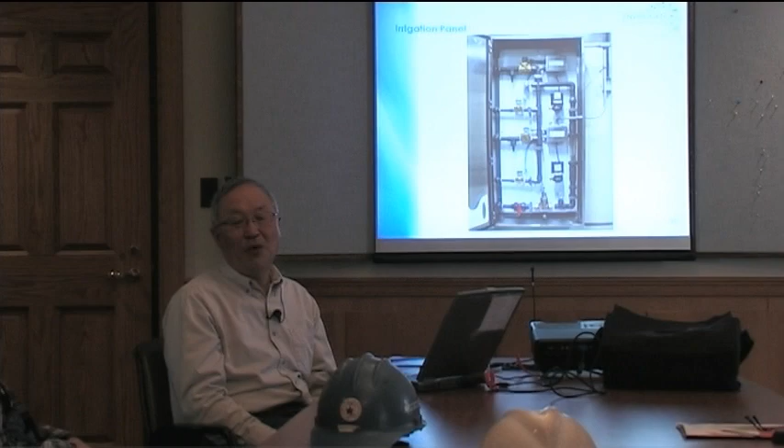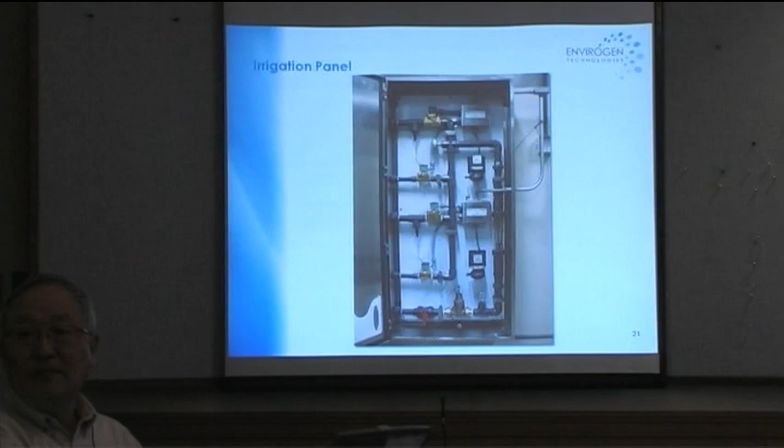We prefer to err on the higher end, so close to that is good. If it starts dropping lower, you want more water. But if it's much higher than that, you might be adding too much water. This is under steady state condition.

From the very beginning, you start neutral, like 7. If after two months, when the bug population is fully developed, you still get 6 or 7, that's too much. Then reduce the water usage step by step, and it will reach steady state quickly.

I think you guys already have a pretty good idea on system number 1, developed on the same design, similar concept, everything. On the other system, in previous O&M, it was 2 to 3, and the other one was 2 to 3 as well, that's why I was curious. It seemed 1 and 2 were okay, kind of low - you can go down to 1 to 2.

But ours is typically more like 4. Did you check it today? The biofilter - what was the pH today? It was higher than that. Is it usually 6? We'll go over that tomorrow.

We were also told with the last sample that we need too much water. If that's the case, you probably added a little too much in the high end. Adding too much water won't hurt the system, it'll only waste some water - you don't hurt the system. But if you have too little water, you will hurt it. If there's too little water, either the acidity goes too acidic or the media can go dry, and that's no good. If you add a little too much water to get the pH a bit higher, that's no problem - it doesn't hurt the system at all.

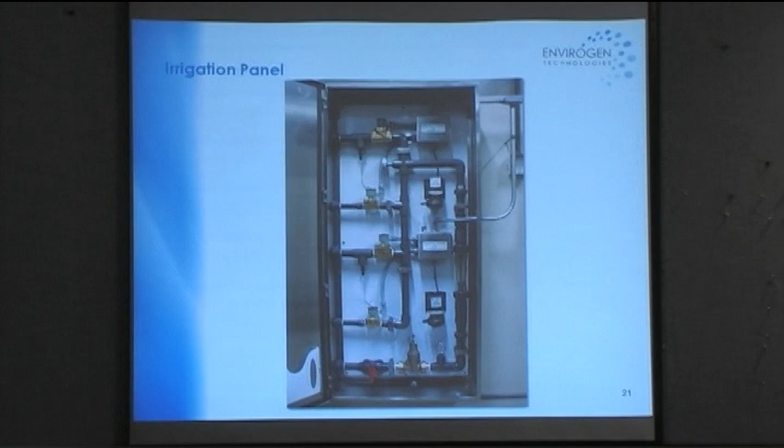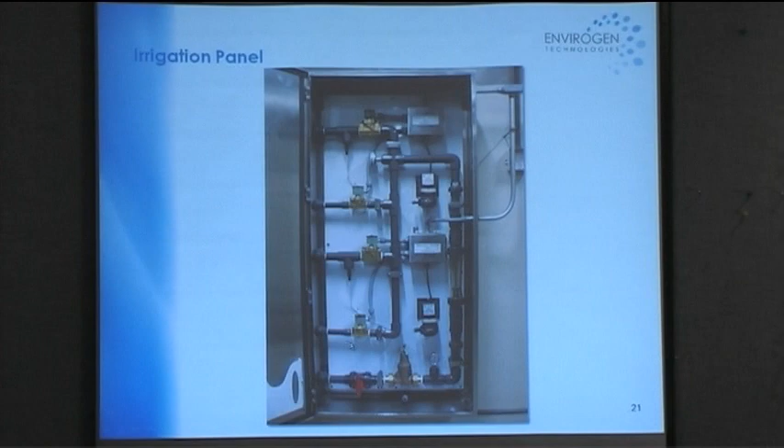Now we're at the irrigation panel. What you have is a big stainless steel box again. Inside, you have 4 solenoid valves - for each chamber, you have 2 solenoid valves, one for the lower irrigation and one for the upper irrigation. So with 2 chambers, you have 4 valves total.

Also you have two nutrient pumps in here, like the gentleman just asked - this is one pump, this is the other. Then your water comes in here, and we have a shut-off valve, then you go through a regulator to set the water pressure.

What we want to see is you set the water pressure. When the water is not flowing, you get about 60 pounds - anything between 60 and 70 pounds is fine, it can change a little bit. Right now the settings are good. When the water is flowing, the pressure will decrease a little bit.

What we read for the past 2 days is about 50 - that's fine, that's good. Here's the water flow meter. When the cycle is on, you can read the float from the top to get your GPM flow.

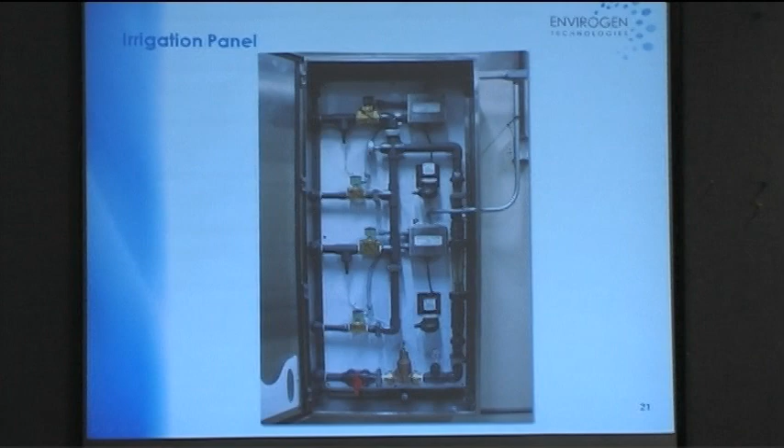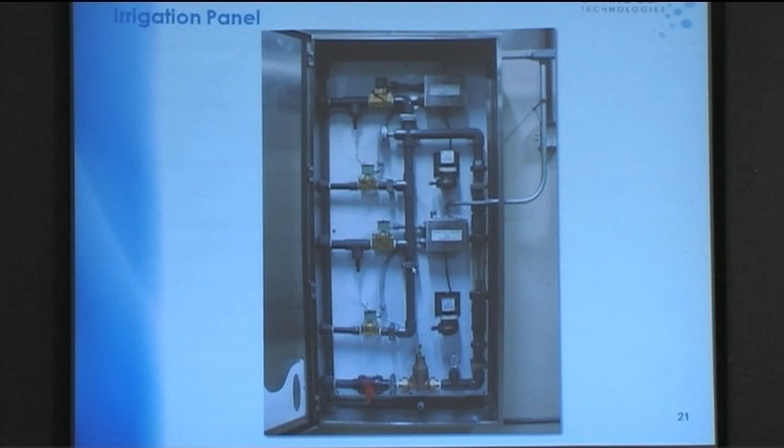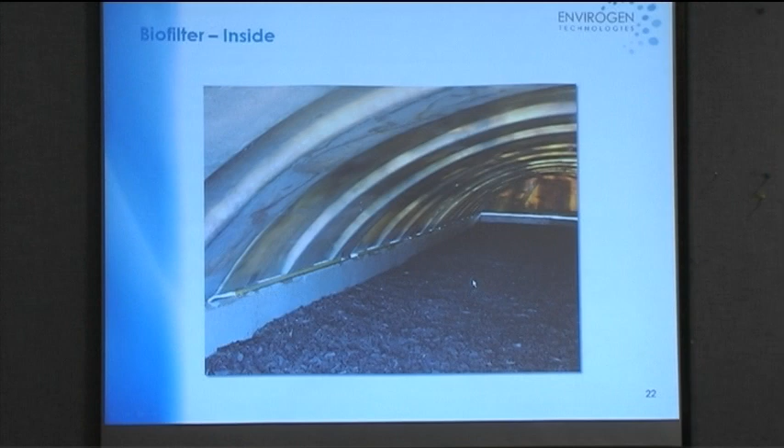Here's the view of the inside of the biofilter. You don't see the spray nozzle - this picture was taken before the upper irrigation nozzles were installed. You can see the media is packed up to this level - this is organic media.

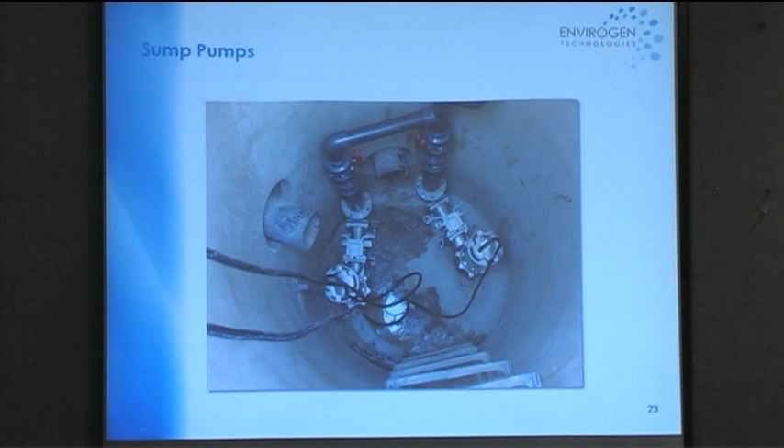This is your sump, the irrigation sump. And what you have is 2 recirculation pumps in here, and one is on duty, one is standby. And this, again, we supply the pump. We did not design the whole thing.

So I think the concept is you use this pump and pump the water through this, go here, go up to this humidification chamber. We have 4 nozzles on each chamber, so then spray water into there. Then the water come from that chamber, come back to this sump through this pipe. Looks like this is a 6-inch pipe. Let's get back to here.

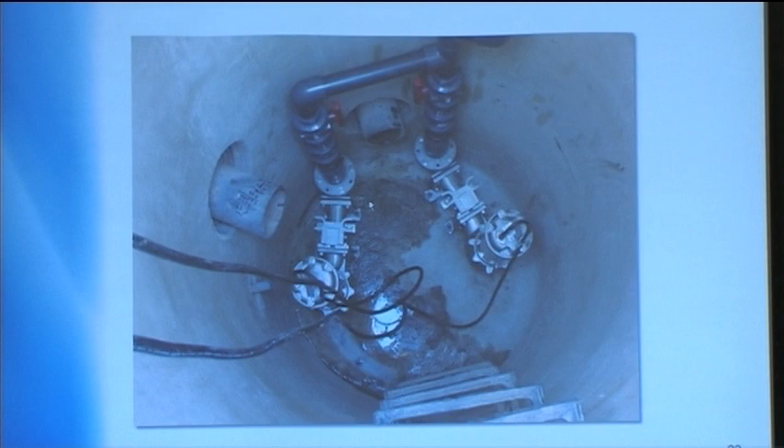And when the water goes up to a certain level, you have an overflow pipe in here. This overflow pipe will take the water from this chamber, from this sump to the waste drain sump to the other one. Okay, then periodically you need to add fresh water to this sump through this pipe. This is a pipe, show up in here.

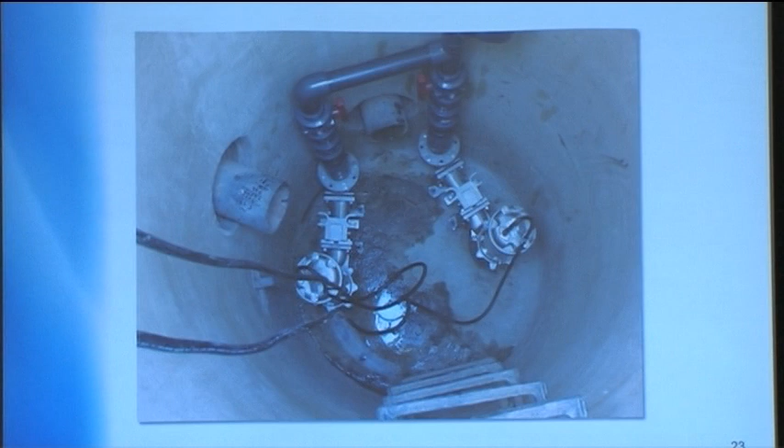So this is controlled by 2 level switches. I don't see the level switch in this picture. I don't know where, it's hanging in there somewhere. Yeah, it's on the top probably. Yeah, we don't see it in this picture. You have 2 level switches there.

Here's the key parameters to have an eye on, or you're doing the log. We have the log sheet in the O&M manual called the Appendix C. We will see that in a few minutes. This is something you need to, in the operation, keep an eye on.

Hydrogen sulfide concentration is always something we need to know because this is the food for the bacteria to grow. Airflow rate, you don't need to check that too much because when it's set, I think it's pretty stable unless you change your operation conditions. And temperature, I don't know if you probably don't have much control. For this one, it's pretty good because most air is sucking from inside of a building, so it's not too cold.

And the irrigation water flow through the flow meters we just saw, and the nutrient supply. That is actually, in a day-to-day basis, this is the only thing the operator needs to do. And they just pay attention to the nutrient tank, don't let it dry. Other stuff is all automatic control. All the nutrient tank need to be a manual refill. That's all.

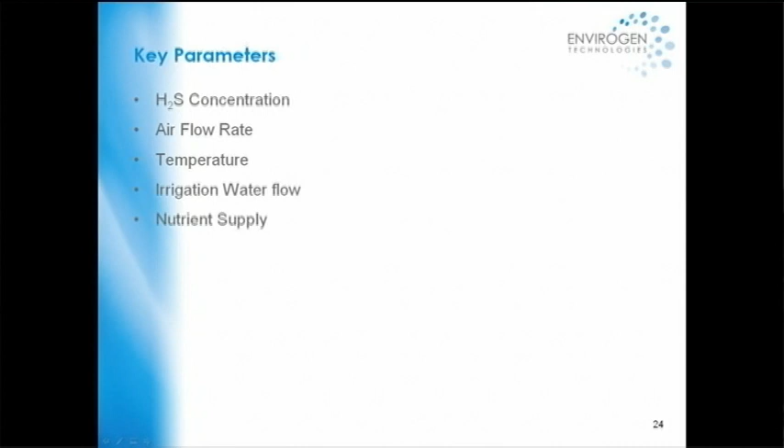All right, then I'm come to the operational log sheet and the process setting history chart. This is in the Appendix C of the O&M manual. This is the log sheet.

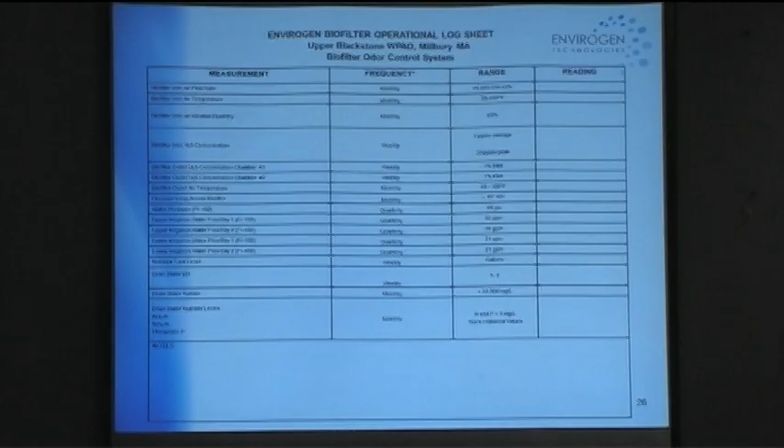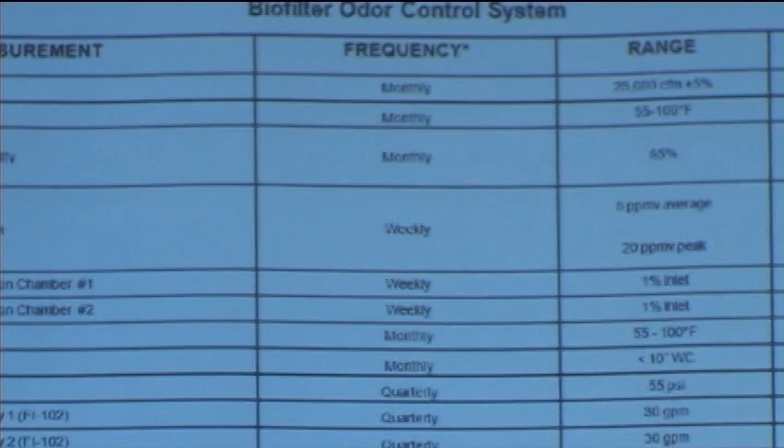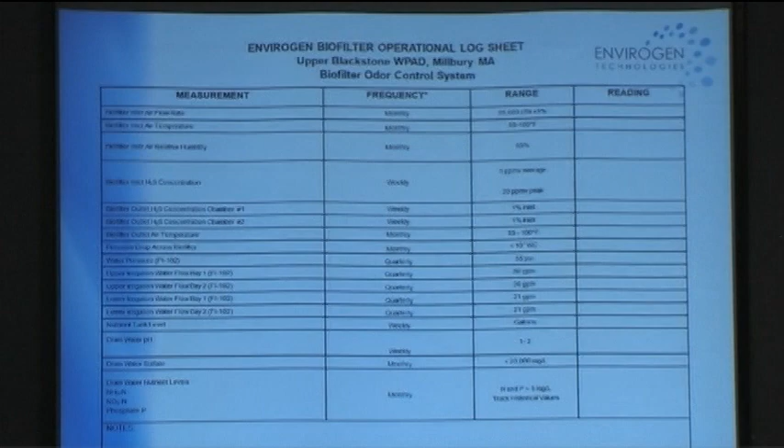If you see the frequency of measurement is pretty low, I'm talking about when the system goes to steady state condition, which is maybe 4 to 6 weeks later. But within the startup period of the first 4 to 6 weeks, the bacteria is growing, you probably need a little bit more frequent measurement just to make sure everything is good. And after that, then you follow this. This is our recommendation.

You do this monthly. Some of the stuff is go monthly, some is go weekly, some go quarterly. So I just can read this. I give you a reading for what we got yesterday afternoon.

So yesterday afternoon, we rebalanced the airflow to the 2 chambers, and right now it can be fluctuating because the air measurement point is not a perfect place. So that is only available. Generally, you measure airflow, you need a certain length of straight pipe, so we don't have that in here, but it gives you a good indication though.

We balanced up at 12,250 CFM each, so add together, it's about 25,000, right? The temperature we measured is 68, that is in the range.

We did not measure humidity. The biofilter inlet hydrogen sulfide concentration we measured quite a few times. Okay, since Tuesday, we always get 0, so we don't read anything from there. So no hydrogen sulfide. Then you have to measure the outlet. Of course, we even measured the outlet, it's 0. If inlet is 0, outlet should be 0 anyway.

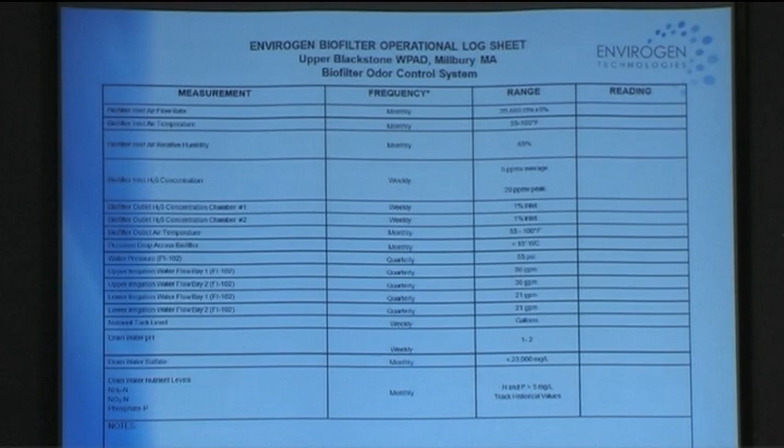And the biofilter air temperature we measured yesterday afternoon is 71, so a little bit higher than the inlet because the whole thing is covered. You collect the water, you collect the warm heat from the sun, so it's a little bit higher.

If the temperature you mentioned, 60 to 80, is good, what would be a concern if the temperature dropped below a certain point for bug activity? At the lower condition, we want to see the temperature range between 55 and 100 F. Generally we don't want it to go beyond 100 F. If it's beyond 100 F, sensitive bugs will be killed. But lower temperature only slows it down, it does not kill anything. They will still be there. Think about the refrigerator, because this is similar to bacteria.

If you put something in the refrigerator, the bacteria stop growing, no function, so your food won't go bad for quite a few days. If you put it at normal room temperature, it deteriorates very fast. Same thing, different bacteria grow in there, it's just working in a different way.

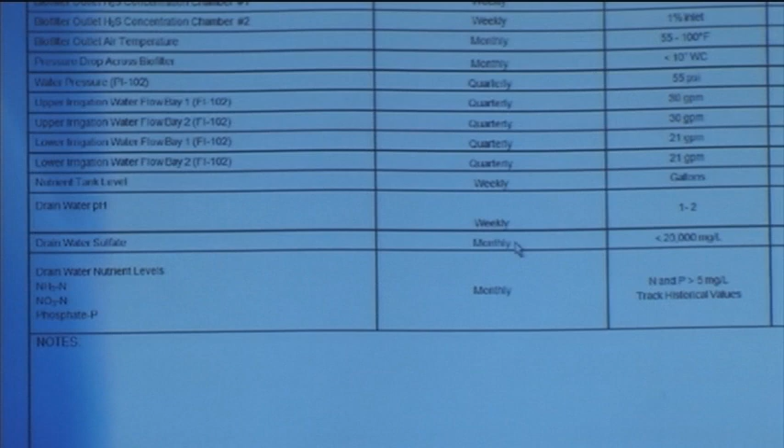One thing I need to mention is the pH we mentioned here is 1 to 2. For the drain water sample, a lot of people just forget it. They don't do it. In most cases, you install the biofilter, and after a few weeks it kicks on, everything's good, people don't complain. People just forget it, they never do anything. But I still suggest you do this at least monthly or quarterly, or if you see the biofilter isn't working properly, then you take a sample.

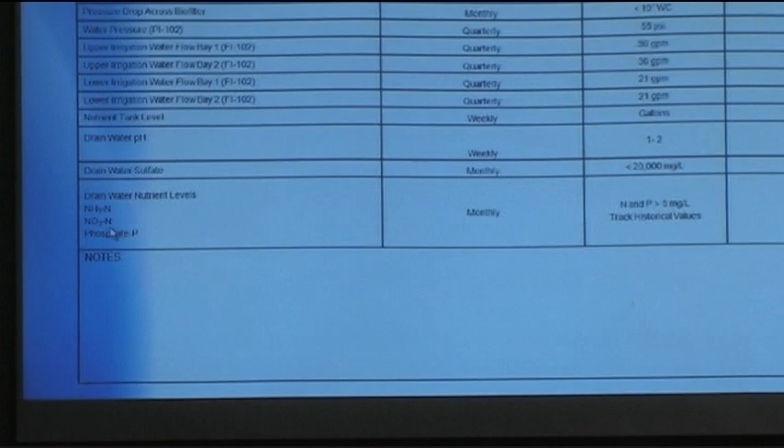That sample needs to be analyzed. Generally we want to see ammonium nitrogen, nitrate nitrogen, and phosphorus should be greater than 5 milligrams per liter. So if you take a sample and analyze this, I think it's convenient for you.

Periodically do analysis on this. It can save you a lot of problems, because if you see your nitrogen and phosphorus is measurable, that means you are not nutrient limited. If you get too high, for example, if you can detect 5 milligrams per liter, that's enough. If you detect 50 or something, that means you don't have much contaminant in there, and you're adding too much nutrient.

Although the nutrient cost is not a big deal, like I said, every batch you need 20 pounds, and 20 pounds lasts you for 4 weeks. We bought that starting nutrient for you, 10 pounds for $17, so $1.70 per pound.

What is the nutrient? Is it readily available? It is really readily available. What we use, you can use any nutrient containing nitrogen and phosphorus, but we prefer one that also contains some micronutrients. It's detailed in the manual. I also gave a label to a gentleman who attended the morning session, he said he uses Miracle-Gro. Yeah, you can use Miracle-Gro, it's readily available from Home Depot, Lowe's, wherever carries it. If you buy a large amount, probably you get a discount.

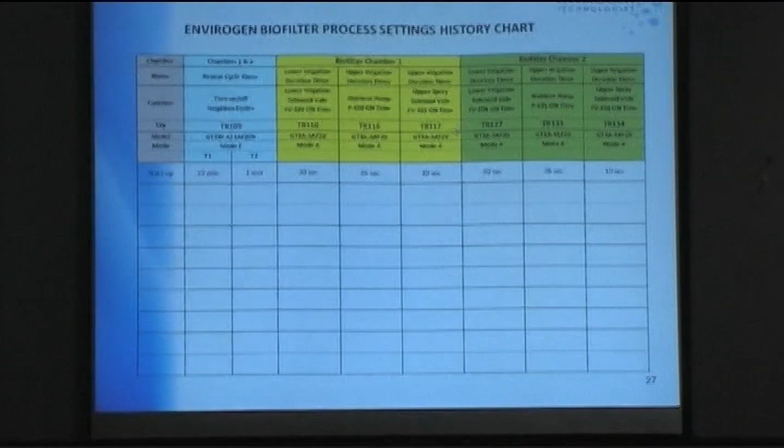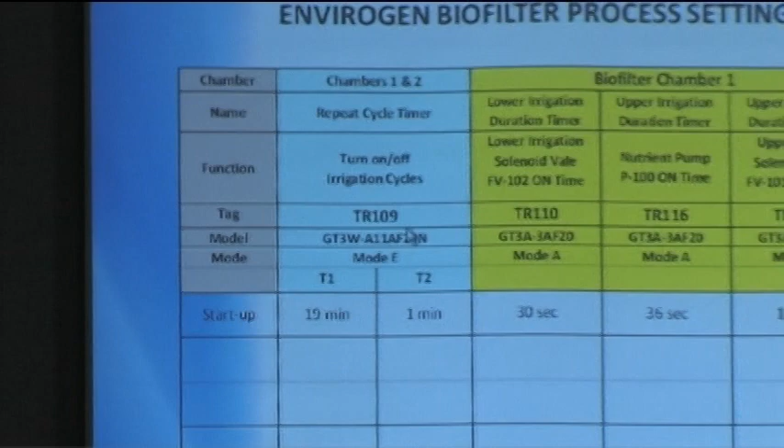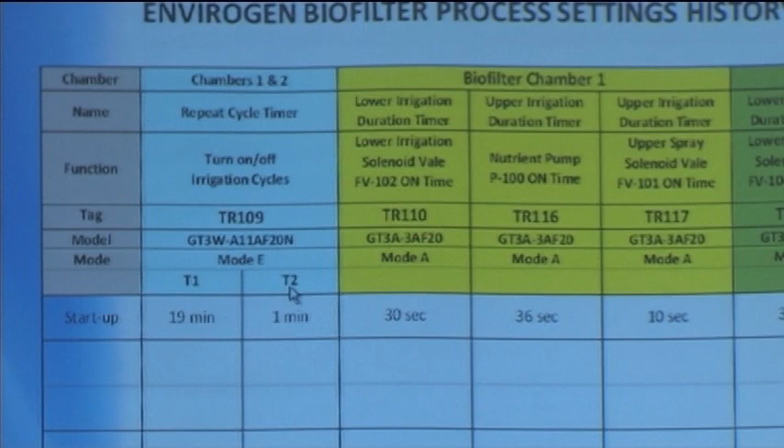Okay, this is the history chart for setting up the timers. Like I said, you have chamber 1 and 2. This one is your repeat cycle timer, which is a different model from the other one, called the GT3W. This one has two timers, T1 and T2. T1 is set at 19 minutes, T2 right now is 1 minute. The 1 and 2 together we call a cycle, put these two together and it's a cycle.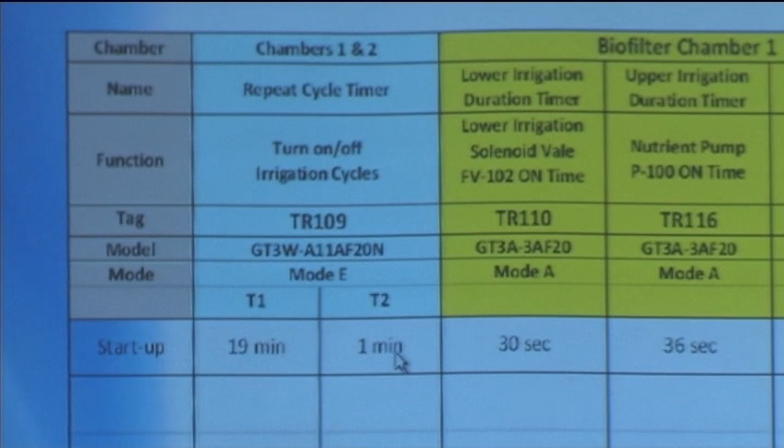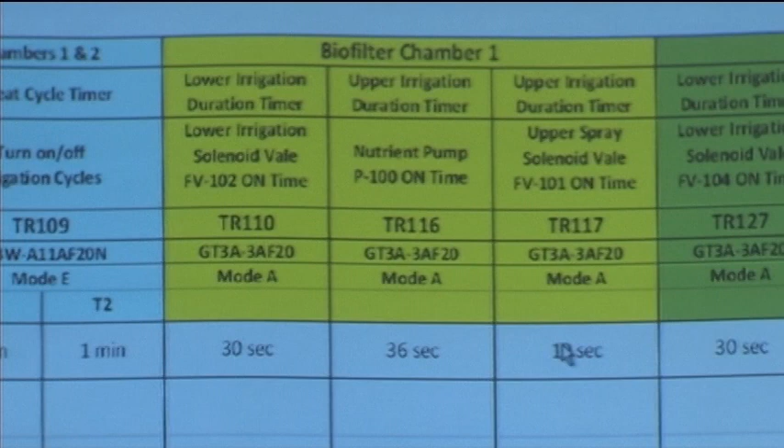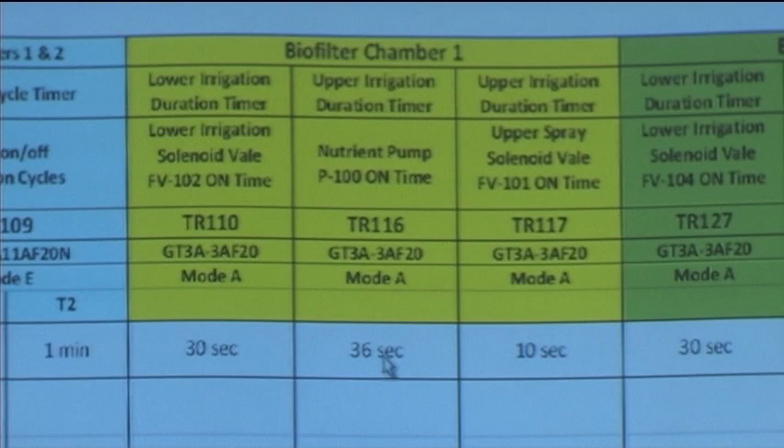That means every 20 minutes, the cycle starts over again. Once the cycle starts, chamber number 1 lower irrigation goes on for 30 seconds. When that's done, the upper irrigation and nutrient pump go on at the same time, but for different durations. The upper irrigation runs for 10 seconds, and the nutrient pump runs for 36 seconds. Don't worry that the nutrient pump runs longer - it's just slow. You get nutrient added in there, and even after the upper irrigation stops, the nutrient stays in the pipe. The next cycle will push it through and spray it on top.

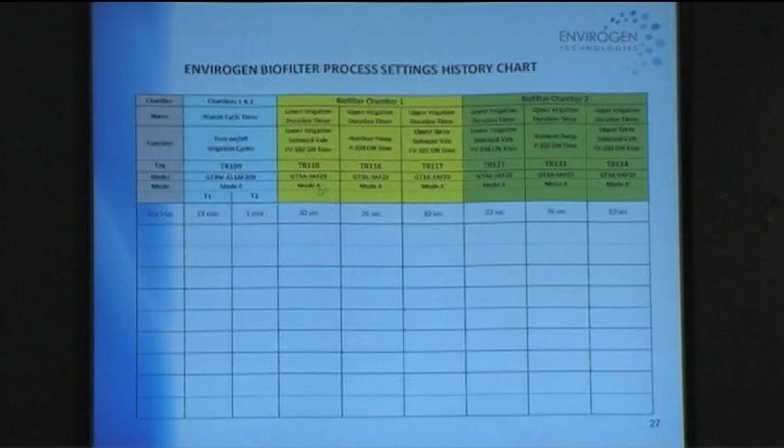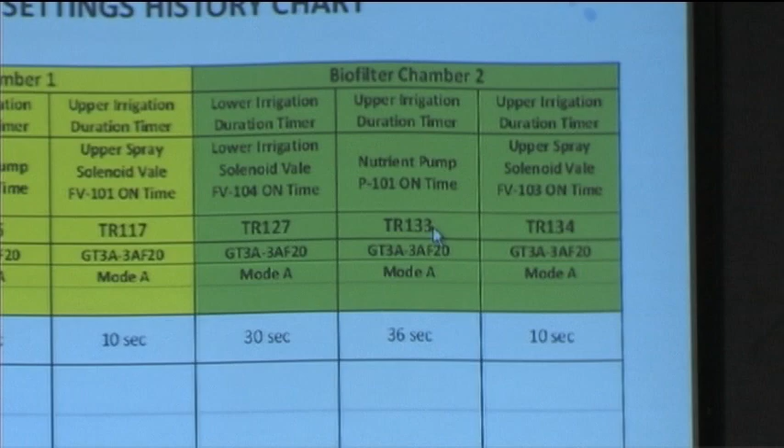So when chamber 1 is done - that's the yellow color thing - chamber 2 starts, with exactly the same timer settings. Each timer is identified by its name, like this one is TR127, TR133. It's labeled on the control panel, you can see it. If you don't change your operating condition, you probably don't need to change this anyway.

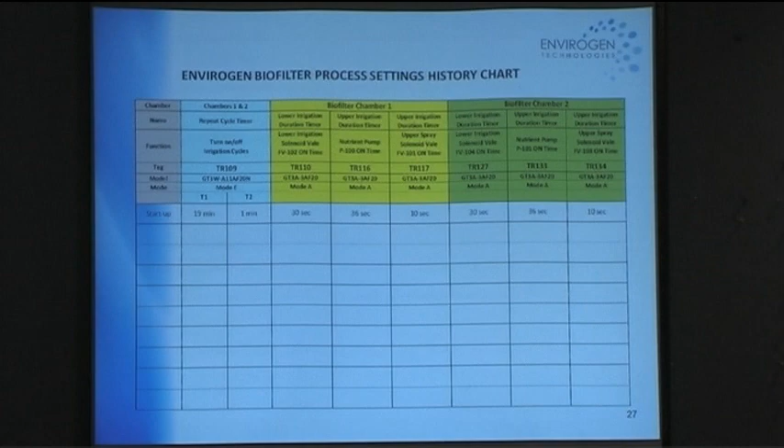You already have it set this way. If you do need to change it - for example, if you take a sample and determine you're adding too much nutrient - you can reduce the nutrient pump from 36 to whatever number you want. You run for a few months or weeks, then take another sample. All the settings are based on the design condition supplied to us, which is 5 to 20 ppm of hydrogen sulfide and other stuff. If the concentration is undetectable right now, we still need to supply some minimum nutrient for the bugs to grow. Otherwise, there's no food for the bugs. So that's our suggestion.

Can you explain the difference between the nutrient pumps in this unit compared to the old unit? What kind of pumps are the new ones? I don't know what's in there for that one - I wasn't involved in that particular job.

Those were dosatron pumps. Oh, that's different - that dosatron doesn't need electricity. It works on a vacuum - you add water to it, creating a Venturi type of effect, creating a vacuum that sucks it through. They have a setting lock in there. So that's different, I'm sorry, I didn't look at that. Those pumps are peristaltic pumps, which need a timer to control them. We changed to this because we had problems with that kind of pump - sometimes the settings weren't accurate, and sometimes you'd get clogging.

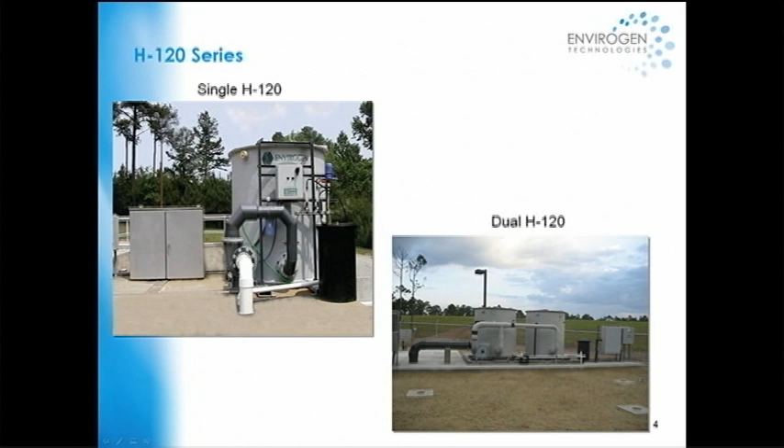This is the H120 series, small - you can put one single, dual, or triple together. This is good for pump stations. If you have a spot and the pump station is small but always gets odor complaints, it's probably emitting from there, and you can put one of these small units in. We've installed a lot of these in places like Florida and Texas.